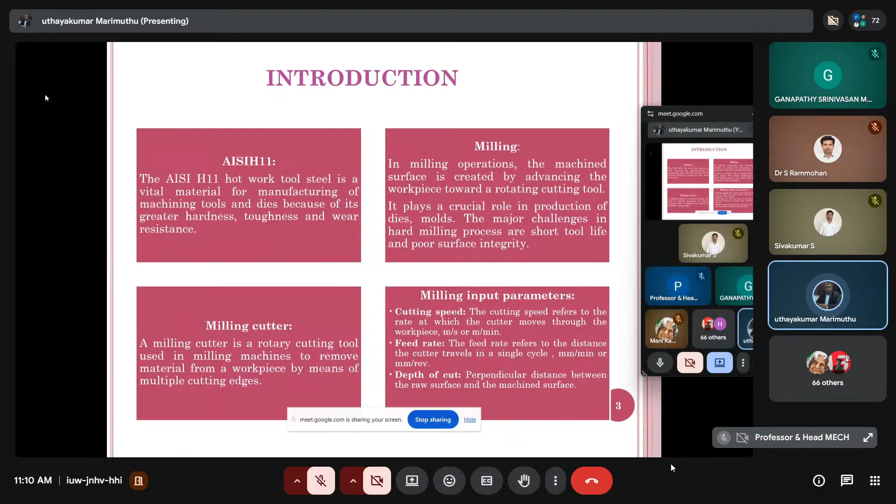It may be 0.1 mm or 0.5 mm, something like that - it depends on this one. So here you can see the milling performance parameters: cutting temperature, surface roughness, and chip. These are all output responses.

The earlier three parameters we discussed are the input parameters, which are under our control. So according to the requirement, we can choose which level we want for the input parameter. The output response is beyond our control - that is cutting temperature, surface roughness, and the chip.

Cutting temperature arises from tool-workpiece friction and material deformation, impacting workpiece integrity, tool life, and cost. Surface roughness is the measure of microscopic irregularities on a machined surface, influencing its texture, quality, and performance. So here, what you heard - there may be ups and downs on the surface.

This is called waviness. For a mating component, we have to be very clear about the surface finish - then only will the assembly work. Unless otherwise specified, we can take the general tolerance, but it depends on the case to case where it is going to apply.

Chip is the material removed during the machining, and its control is crucial for a smooth, high quality machined surface. Since it is a brittle material, we cannot go for long chips - it should be short, and we have to take into account how the chips are removed from the workpiece material. This chip nature determines the surface quality or surface texture, etc.

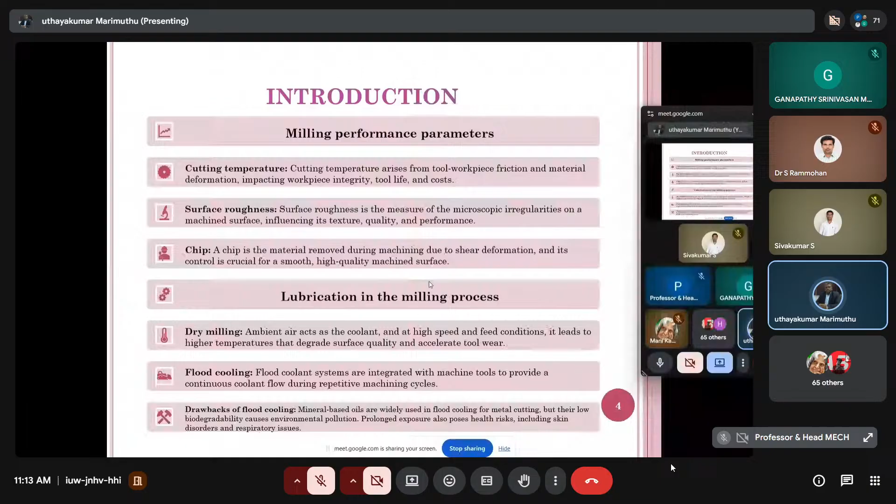This is about the MQL system. Here, lubrication in milling operation, minimum quantity lubrication that we have to ensure, that we have to use. For this purpose, MQL is abbreviated as minimum quantity lubrication system.

This is overcoming flood cooling. Unnecessarily excess coolant is used in this case without having any calculations, right? So that should be avoided here.

MQL method delivers a precise mixture of compressed air and cutting fluid in minimal quantity, which is then directed exactly in the machining zone through a nozzle. So the cutting zone is cooled, and the temperature remains constant throughout the machining process. So it serves as a sustainable machining technique, offering ecological, economic, and operational benefits.

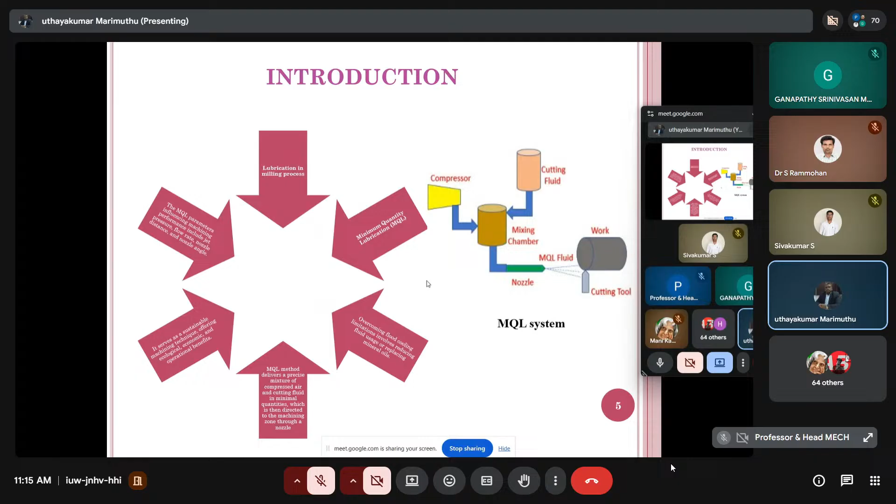Now this is about vegetable oil in the MQL system. Vegetable-based oils are a greatly attractive replacement for mineral-based cutting oil since they are renewable, eco-friendly, and easily decomposable. Vegetable oils such as soya bean, sunflower, sesame oils, and natural fatty acids form a strong adhesive film on metal surfaces, reducing friction and wear.

So we cannot eliminate friction and wear at any point of time. Without friction, we cannot walk. If the surface has no friction, we cannot walk. So minimum friction should be there, depending upon the type of flooring. In case of mud surface, the friction should be more. If it is mosaic or tiles, different coefficients of friction will be there. But friction is essential in our day-to-day life. Without friction, we cannot stop the vehicle. So we can minimize it as far as possible.

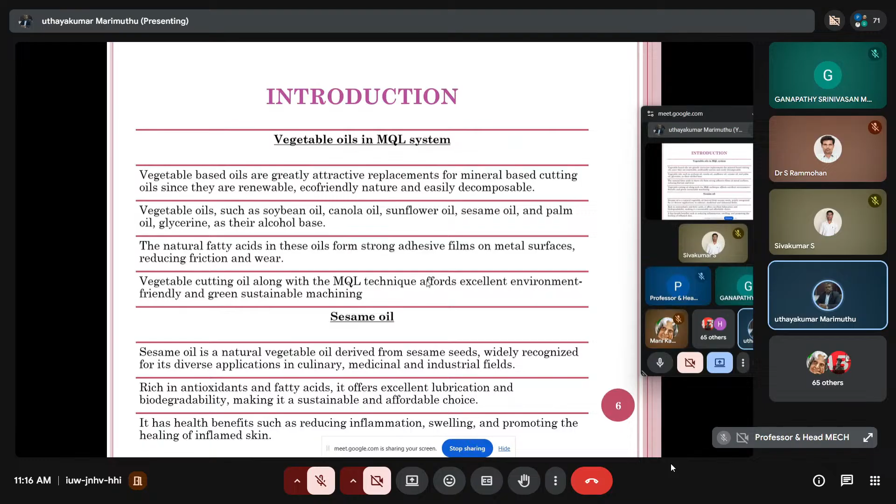So vegetable cutting oil along with MQL technique offers excellent environment-friendly and green sustainable machining. Sesame oil is a natural vegetable oil derived from sesame seeds, widely recognized for diverse applications. Rich in antioxidants and fatty acids, it offers excellent lubrication and biodegradability. It has health benefits such as reducing inflammation, swelling, and promoting the healing of inflamed skin.

Now, we are going to use nano-based cutting fluid and graphene nanoplatelets. It is for the cooling purpose that we are using in the milling process.

Why am I giving this much information in this case study? Because you have to understand what is what. We cannot do this optimization merely without having real-time data. Real-time data is very important in getting reliable results. So you have to double check the experimental results. If you want to perform experimental results, you have to take a proper survey, meaning you have to design the experimental design. It is very important, so now we are using this one.

I don't know how many research scholars are attending this. Novelty is very important in your research. What is the new thing you are going to find? What is the deliverable, and where is it going to be used? Who will be the benefiter?

In those days, it was not much attracted by the researcher. Now it is a big question by similar interest group people. Merely academic research will not work it out, meaning you get funding, submit the report, publish a paper, and one person gets a PhD. That is not what you call the parameter at present.

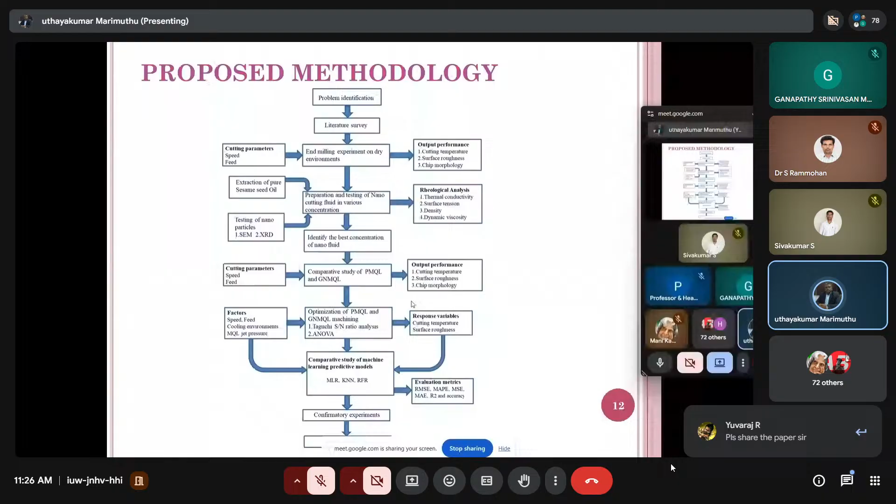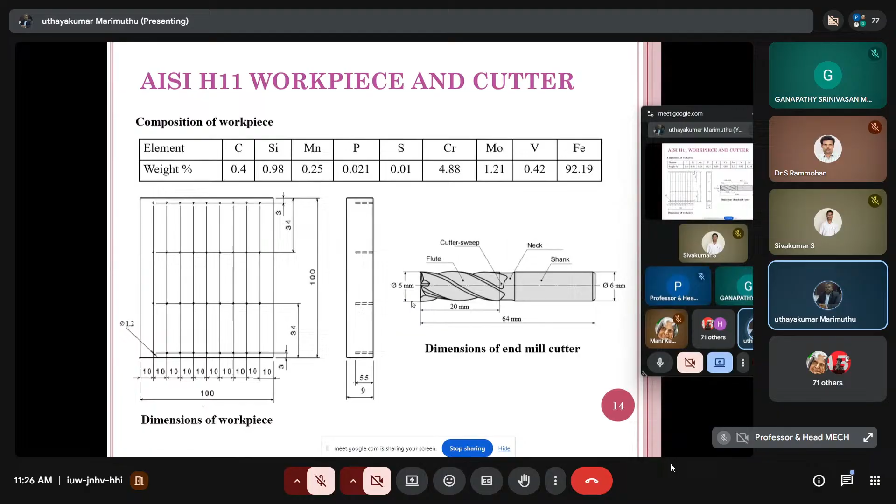Now you can see this is about the workpiece and cutter type of material, how we are going to use it, what are the major compositions of the workpiece, and the dimensions of the end milling cutter. Now this is the MQL equipment.

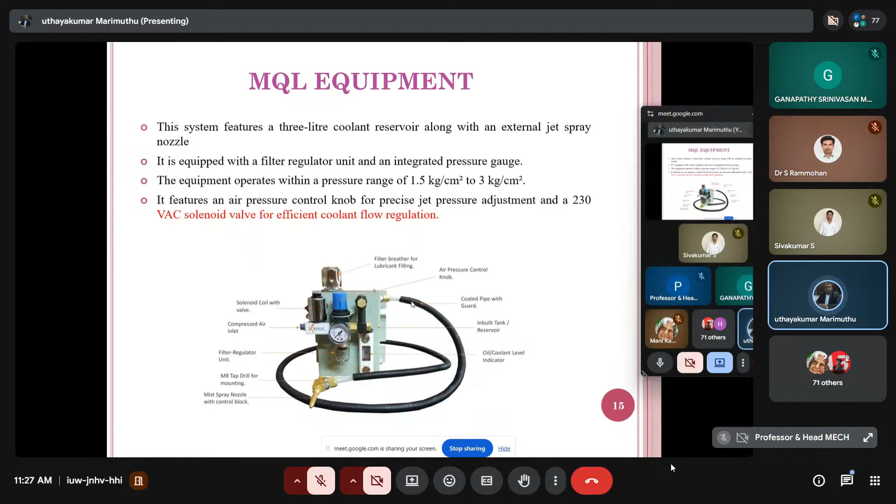The system features a 3-liter cooler, so only a small portable one we have developed. A 3-liter coolant reservoir along with an external jet spray nozzle. It is equipped with a filter regulator unit and integrated pressure gauges. The equipment operates within the pressure range of 1.5 kg per centimeter square to 3 kg per centimeter square. It features an air pressure control knob for precise jet pressure adjustment and a 230 VAC solenoid valve. This is our own design that we have done.

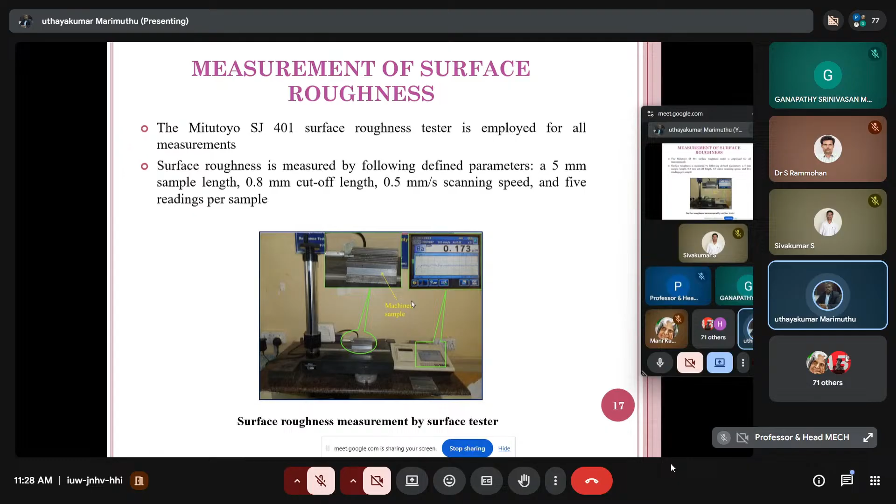Next one is the surface roughness measurement. A Mitutoyo SJ401 surface roughness tester is employed to measure the surface roughness. We are reporting the arithmetic average RA value, and the specification reported here is 5 mm sample length and 0.8 mm cutoff length. We did this for every machined surface, and the roughness value is reported.

Now, the dry milling experimental framework. This experimental framework is very important. Researchers, all of you keep in mind that you are going to take some values as input parameters. How do you choose this input parameter? There are different ways: one is by means of previous literature, or the limitation of the machine, or the requirement of the applications where you want to go. Another is the specification given by the manufacturers. There are 4 different parameters associated with that. So you have to be careful while choosing the experimental design. It is very important, so thorough literature review is very important.

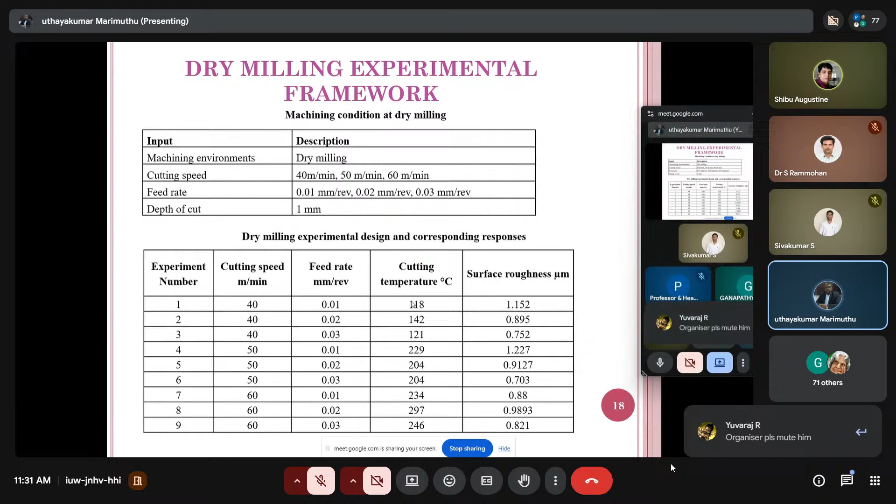Next, this is another important thing: the discussion or science behind the results. We have to do this in a systematic way. Such evidence is very important. How should it be? It should be XRD analysis. XRD confirms a graphene plane. Another one is from the SEM, showing a sheet-like structure with folds and wrinkles.

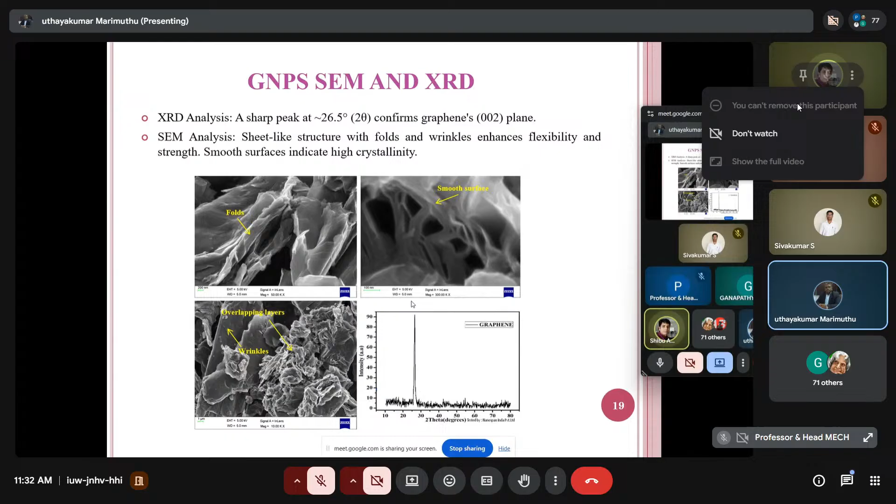This is witnessed through the metallurgical evidences. The metallurgical evidence is very important in giving the scientific report. The scientific report is very important accordingly. Then preparation and testing of nanofluid.

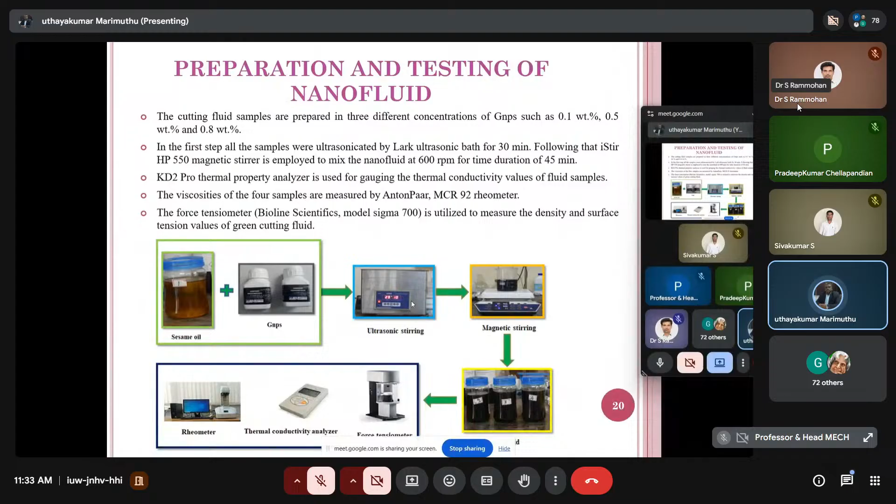It's actually about the preparation and testing of nanofluid cutting fluid. The cutting fluids are prepared in 3 different concentrations of graphene nanoplatelets: 0.1, 0.5 and 0.8%. This is the sequential steps associated with preparing that, by means of magnetic stirring, and we are getting the nanofluid according to our requirement.

This is about the comparative study of PMQL and GNMQL environment or framework that we have. So the machining environment, PMQL and GNMQL, cutting fluid, sesame oil, graphene reinforced sesame oil, and cutting speed is 40, 50 and 60 meter per minute, along with feed rate and depth of cut.

Depth of cut throughout the process is constant at 1mm, and the flow rate and jet pressure are given. These are all the input parameters that we can limit or control ourselves.

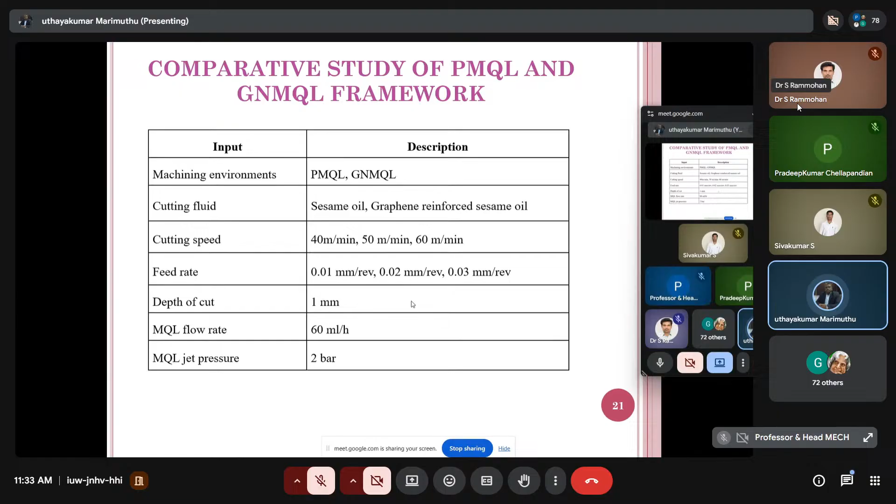Now when you see the experimental results, the last 2 columns, the cutting temperature and surface roughness, these two are the visible output response from this individual experimental process. It may be 18 number of experiments. The first 9 are PMQL environment, and the rest is GNMQL environment.

Accordingly, the cutting speed and feed rate are given. Depth of cut I didn't mention because it is 1mm throughout the process. You can see the output of cutting temperature and surface roughness in microns.

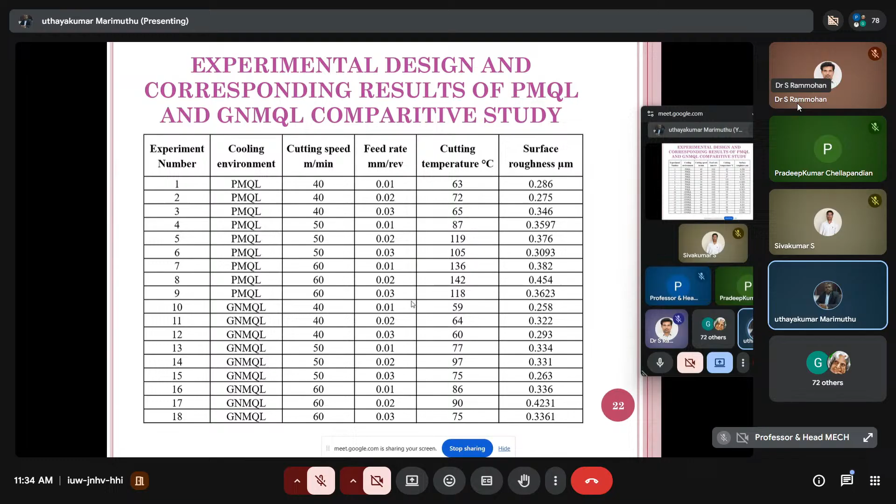This is the framework for statistical analysis. The experimental parameters were systematically arranged using Taguchi L36 orthogonal array. The optimization process was conducted using Taguchi signal-to-noise ratio methodology, employing Minitab 18 software. ANOVA was performed by evaluating the significance of factors influencing both cutting temperature and surface roughness.

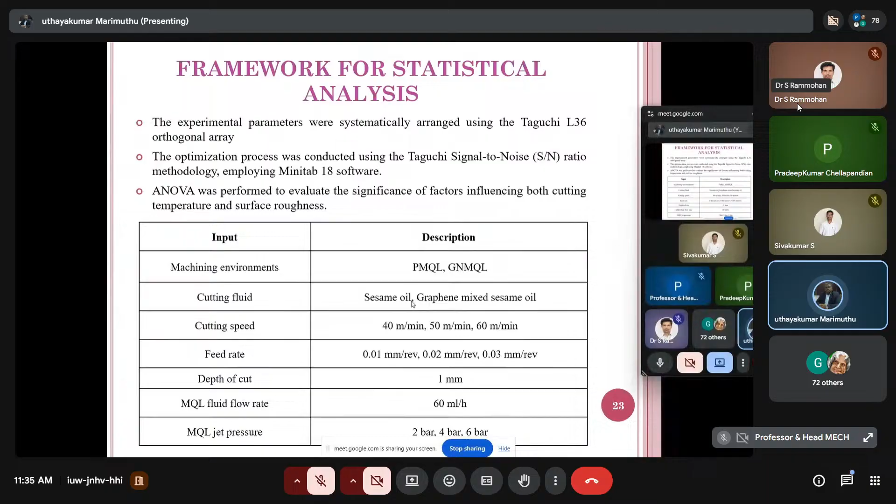This is about machining environment, cutting fluid, cutting speed, feed rate, depth of cut, MQL flow rate, and jet pressure. Jet pressure we varied 2 bar, 4 bar, and 6 bar. Feed rate also varied 0.01, 0.02, and 0.03. Cutting speed 40, 50 and 60, like that.

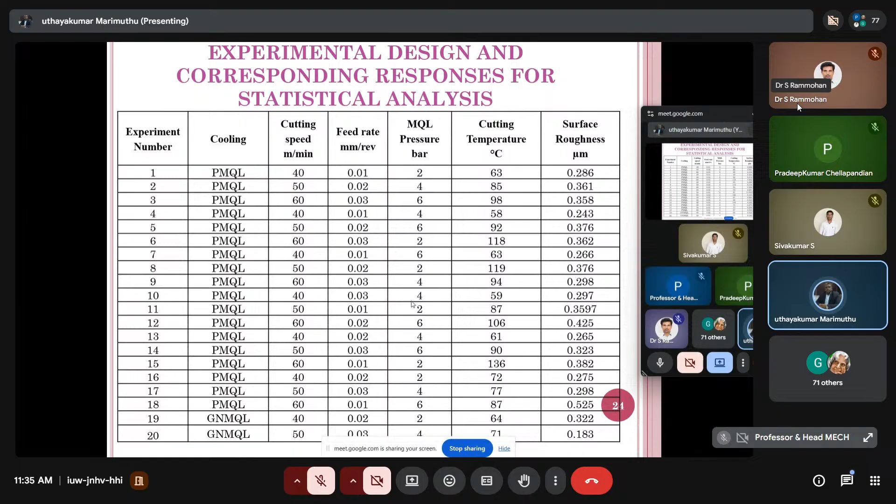Now you can see the corresponding results about the experimentation - experimental design and corresponding responses for statistical analysis. This is very important for our analysis. Totally 36 experiments have been planned and we did accordingly. These are the results for the total 36 experiments.

Now, the data processing for ML models. Python programming was used for feature engineering and the creation of ML models. The dataset dimensions are checked, revealing 36 rows and 6 columns. Someone asked about L36, L27 - it depends on the factor of safety. It was verified that there were no null values in the dataset.

A histogram was used to assess the distribution of numerical variables, and box plots were employed to identify outliers. The relationship between variables were analyzed using a correlation heat map. The Gaussian data augmentation technique was employed to mitigate overfitting caused by the limited dataset.

The dataset was divided into X for explanatory variables and Y for the response variables, cutting temperature and surface roughness. The standard scaler technique was applied to ensure all the features contributed equally to the learning process and to improve model performance. This is the methodological approach for the ML model.

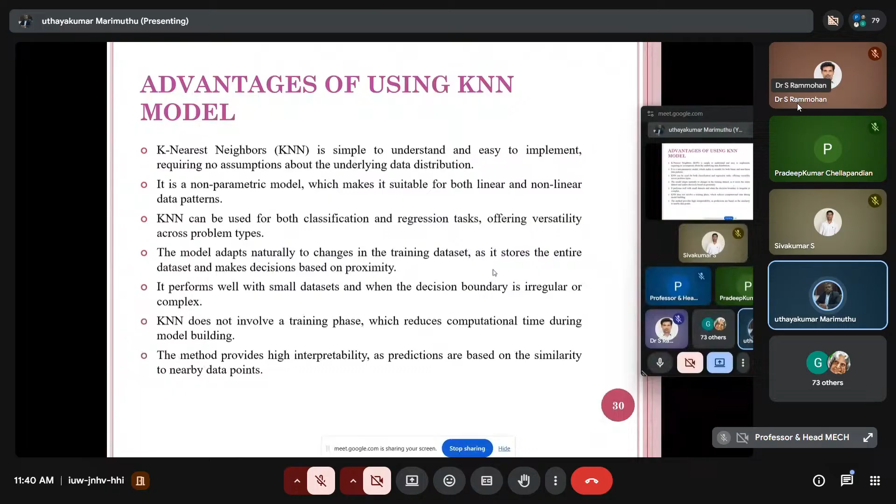This is about the KNN working principle. It's a supervised learning algorithm used for classification and regression problems. It works based on the idea of similarity. The outcome for the new data point is predicted based on the outcomes of its nearest neighbors in the training data.

Then evaluation metrics for ML models. Machine learning model evaluation metrics quantify how well a model performs, providing insight into its accuracy, efficiency, and suitability for the task at hand. These metrics help compare different models and algorithms, ensuring that the chosen model is accurate, dependable, and appropriate for the specific problem. This is the evaluation metrics for ML models.

It's the mean absolute error, which measures the average absolute difference between predicted and actual values. Lower MAE means better accuracy. Mean squared error calculates the average of squared differences between predicted and actual values. Root mean squared error measures the average size of prediction errors. The lower the RMSE, the closer the model predictions are to the real values.

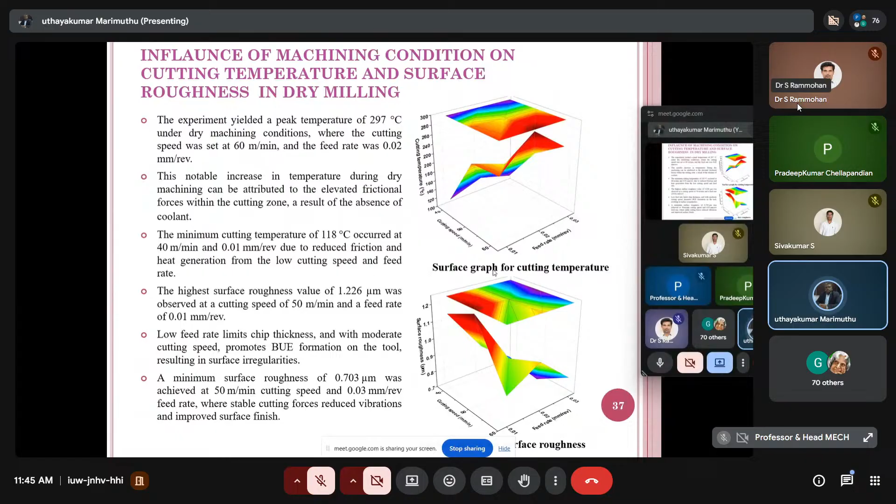A minimum surface roughness of 0.703 microns was achieved at 50 meters per minute cutting speed and 0.03 mm per revolution feed rate, etc. Now you can see the chip morphology in the dry machining process for each condition.

It is very important to look at the metallurgical evidence for chip morphology at each machining condition. According to the examination of the chip, there are scratches on the face. The cohesive force amid the AISI H11 and the tool produces the scratches, while the chip flow workpiece got scraped due to the existence of hard particles on the tool exterior.

At high cutting speed and increased feed rate, fragmented chips are more likely to form due to excessive strain and localized heating. There is no chance for continuous chip formation; it is not a ductile material. The hairy layer of chip in dry machining conditions is evidence of a more ductile structure.

At higher speed and feed rates, the chip appeared curved due to increased heat, lack of lubricant, and heat transfer at the tool-chip interface. At low cutting speed and low feed rate, continuous chips are formed due to smooth and stable shearing of material. You can see the first one, that is a serrated one. The purple colored chips were observed at high cutting speed and feed conditions.

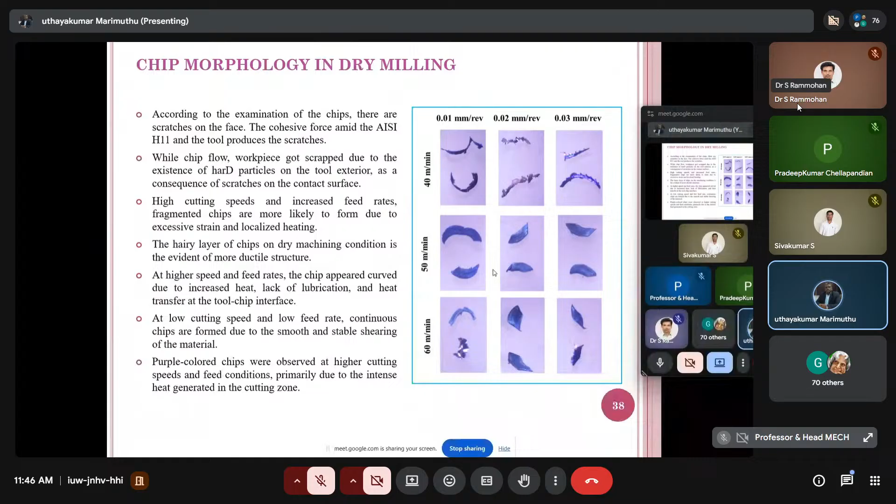Now it is about the nanofluid preparation, testing, and a comparative study of PMQL and GNMQL. This is the first case study, over. This is the next one.

Now analysis of thermophysical properties of the cutting fluid. The thermal conductivity increased with higher GNPS concentration due to the superior thermal properties of GNPS compared to vegetable oil. The thermal conductivity value of nanofluid at 0.8% concentration is the maximum. The surface tension value influenced by GNPS concentration decreased with increased value, owing to the attraction between the higher intermolecular energy of nanofluid, so surface tension decreased within the concentration. The penetrability of nanofluid is enhanced due to the lower surface tension value, which leads to effective lubrication in the cutting zone. The density increased with GNPS concentration measured, and the highest viscosity value is 86.12. The thermophysical property analysis revealed that GNPS with 0.8% weight exhibited potential results among all. That is the conclusion we made from this study.

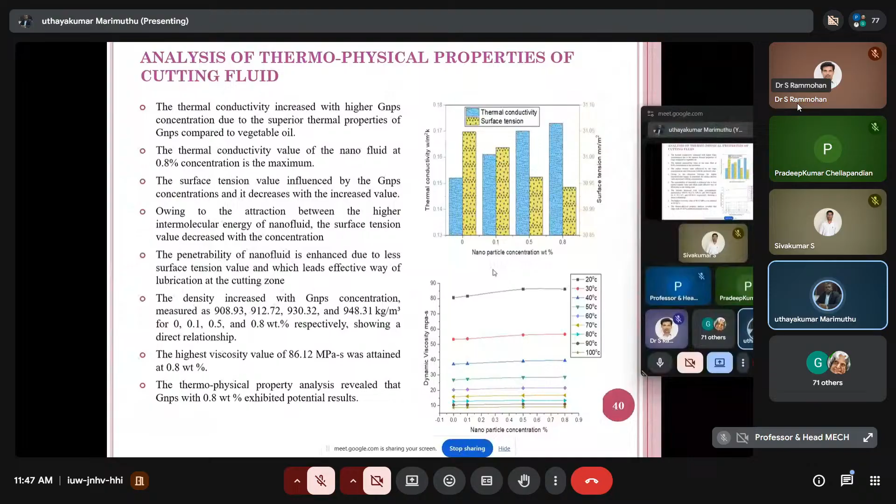Then, influence of machining conditions on cutting temperature in PMQL and GNMQL environment. Now we are introducing the coolant; in the previous case there was no coolant. Now you can see the cutting temperature is lowered by 55%, from 297 to 142. Earlier case it was 297, now it is 142. So approximately 55% of temperature is decreased through enhanced lubrication.

While GNMQL with nanoparticles further cools to 90 degrees centigrade, totaling a 54.3% drop from the dry machining process when compared. This notable reduction can be attributed to the lubrication effect, which facilitates convective heat transfer with minimal but effective lubrication supplied in the PMQL system. The introduction of nanoparticles augments the lubrication and thermal properties of the cutting fluid in the GNMQL environment. The lowest temperature recorded in GNMQL conditions was 59 degrees centigrade at a cutting speed of 40 meters per minute and a feed rate of 0.01 mm per revolution.

The cutting temperature rise is attributed to increased spindle speed and so on. The higher cutting temperature is noted at 0.02 mm per revolution feed rate compared to 0.03 mm per revolution, due to increased contact time between tool and workpiece.

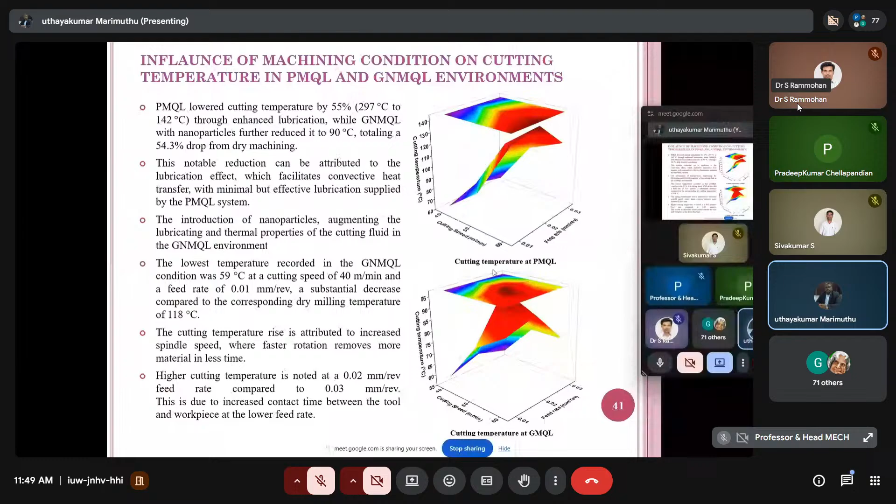Our core job is the real-time experimentation; modeling is a portion of your thesis. In my point of view, it may be 80-20 or 90-10, but the prediction is very important, so that is very approachable using n number of data.

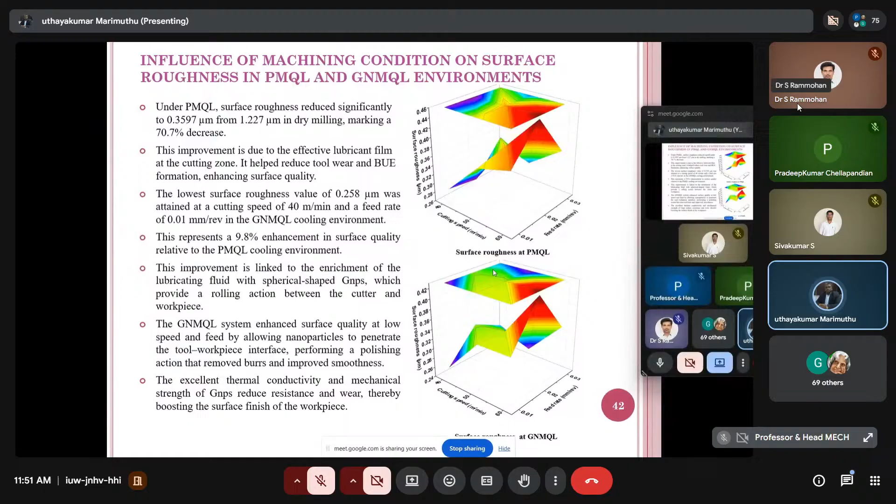The improvement is linked to the enrichment of the lubricating fluid with spherical shape GNPS, which provide a rolling action between the cutter and workpiece. The GNMQL system enhances surface quality at low speed and feed by allowing nanoparticles to penetrate the tool-workpiece interface, and in that way we claim that superior surface finish is realized by adding this GNMQL environment.

Then the GNMQL shows, what do you call...

They're calling for some other meeting.

An effective decrease in cutting temperature is achieved with an elevation in jet pressure, reaching optimal efficiency at 4 bar pressure. The optimum pressure ensures finer oil mist droplets, improving lubrication and reducing friction in the cutting zone.

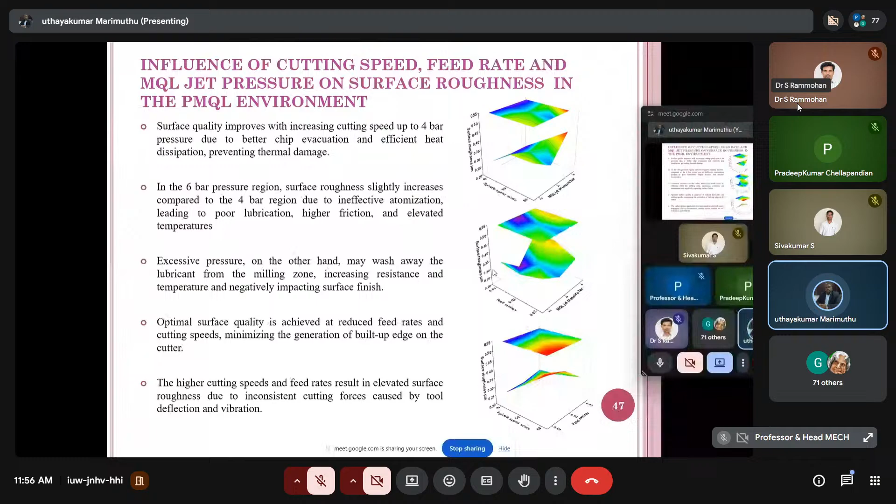That can be measured by instrument - a cutting force dynamometer - we can use that. So this is about the surface roughness in the GNMQL environment.

The introduction of spherical shaped nanoparticles between the milling cutter and workpiece facilitated a rolling action, substantially reducing resistance, wear, and heat generation during cutting operations. Consequently, this resulted in lower cutting surface roughness values across all speed conditions compared to traditional PMQL conditions.

Minimum surface roughness occurred at 0.01 mm per minute feed rate at high pressure, likely due to better penetration of lubricant and nanoparticles into the cutting zone. Lower cutting surface finish was observed at lower machining parameter conditions, and vice versa.

The enhancement in surface quality is due to the polishing and self-repairing effect enabled by the nanoparticles. The lowest surface roughness of 0.172 micron was achieved with optimal machining conditions in a GNMQL environment, with input parameters of cutting speed 60 meters per minute and feed rate 0.01, and so on.

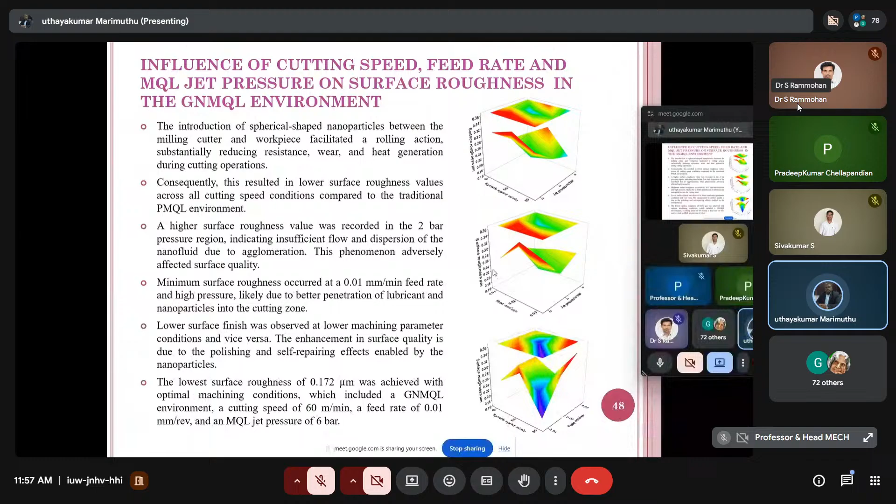This is about the Taguchi-based analysis of optimum parameters for cutting temperature and surface roughness.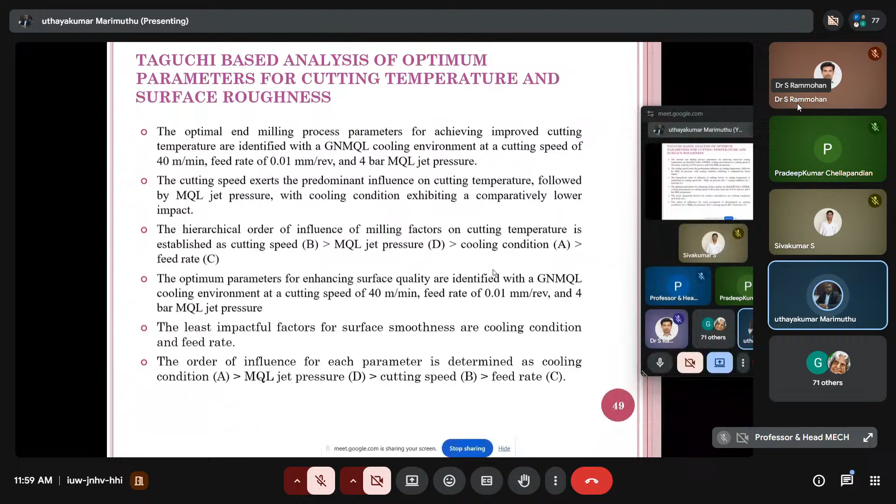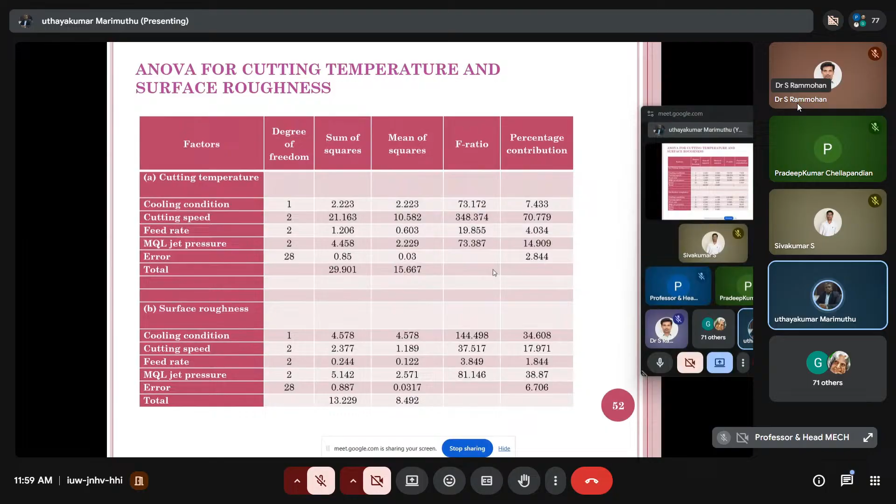The optimum parameters for enhancing surface quality are identified with the GNMQL cooling environment at a cutting speed of 40 meters per minute, feed rate of 0.01 mm per revolution, and 4 bar MQL jet pressure. The least impactful factors for surface smoothness are cooling conditions and feed rate. The order of influence for each parameter is: cooling conditions A, MQL jet pressure D, cutting speed B, then feed rate C. This is about the mean value for surface roughness, as opposed to earlier which was temperature. Now we move to feature engineering insights for the cutting temperature data.

Analysis of the distribution plot reveals that speed, feed, and MQL pressure exhibit uniform distribution. A positive skewness is evident in the frequency distribution of cutting temperature, attributed to the prevalent occurrence of temperatures within the 100 to 130 degrees centigrade range, due to the utilization of PMQL and GNMQL techniques. In the box plots, no outliers were detected in the speed, feed, and MQL pressure data. However, outliers are observed in the cutting temperature box plot, particularly in instances of PMQL machining conditions.

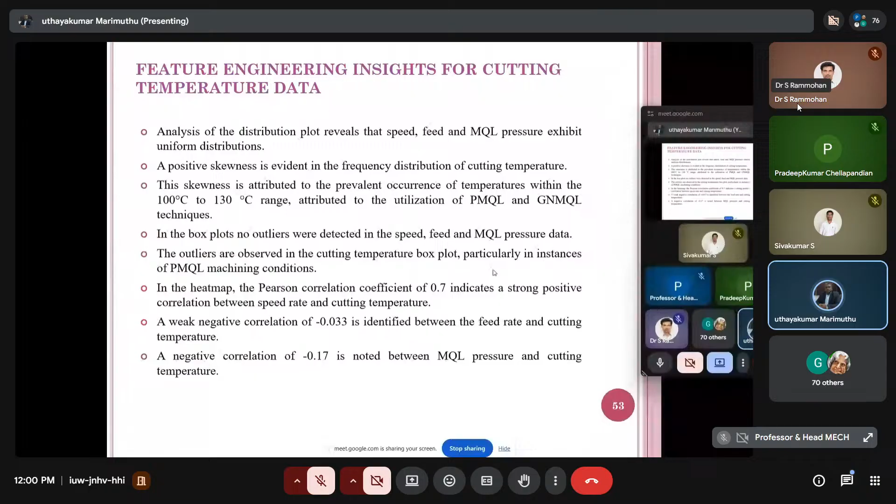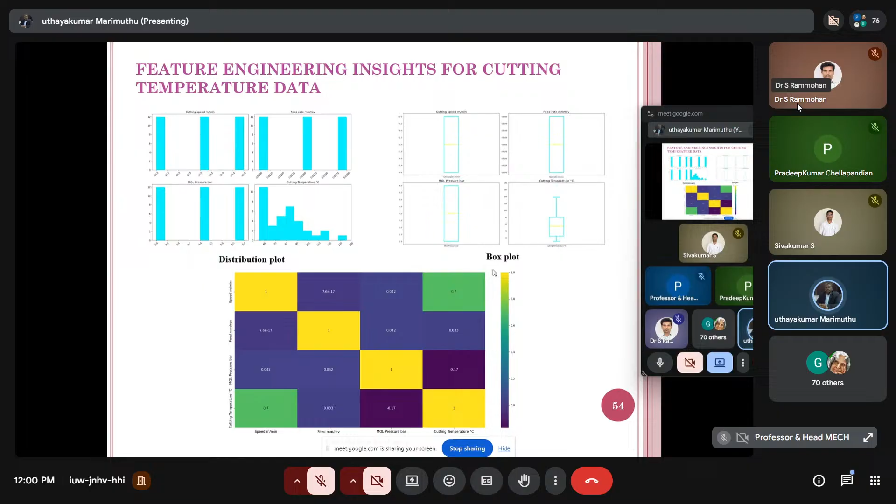In the heat map, the Pearson correlation coefficient of 0.7 indicates a strong positive correlation between cutting speed and cutting temperature. A weak negative correlation of minus 0.033 is identified between feed rate and cutting temperature. A negative correlation of minus 0.17 is noted between MQL pressure and cutting temperature. Now you can see the feature engineering insights for cutting temperature data and heat distribution, as witnessed in the box plot reported there. This is about the surface roughness data.

The distribution plot shows that cutting speed (40, 50, 60), feed (0.01, 0.02, 0.03), and MQL jet pressure (2, 4, 6 bar) are uniformly distributed. The surface roughness distribution shows positive skewness with most values between 0.25 to 0.38 microns due to PMQL and GNMQL use. Higher values of 0.43 to 0.53 are linked to ineffective jet pressure, which is an inference from our study. The analysis of box plots reveals no outliers in speed, feed, and MQL jet pressure, while outliers are evident in the surface roughness box plot, especially under PMQL machining conditions.

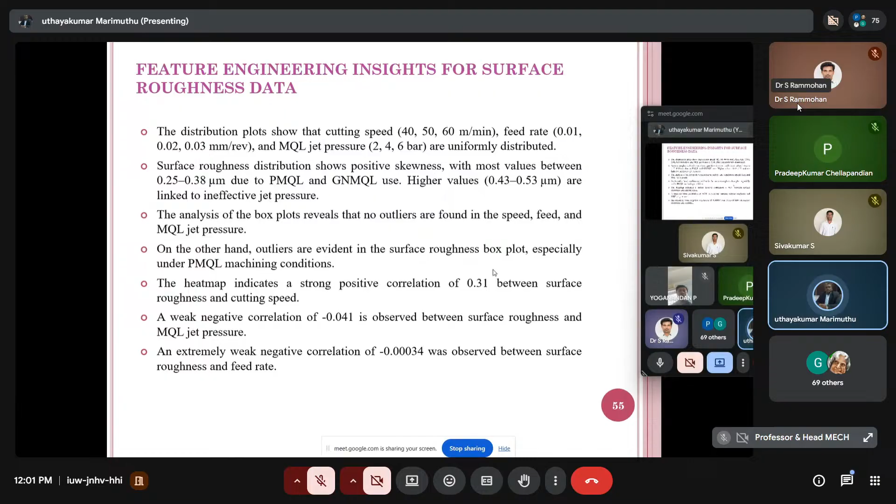The heat map indicates a strong positive correlation of 0.31 between surface roughness and cutting speed. A weak negative correlation of minus 0.041 is observed between surface roughness and MQL jet pressure. An extremely weak negative correlation of minus 0.00034 is observed between surface roughness and feed rate. Appropriate evidence to show this was presented using the distribution plot and box plot reported there.

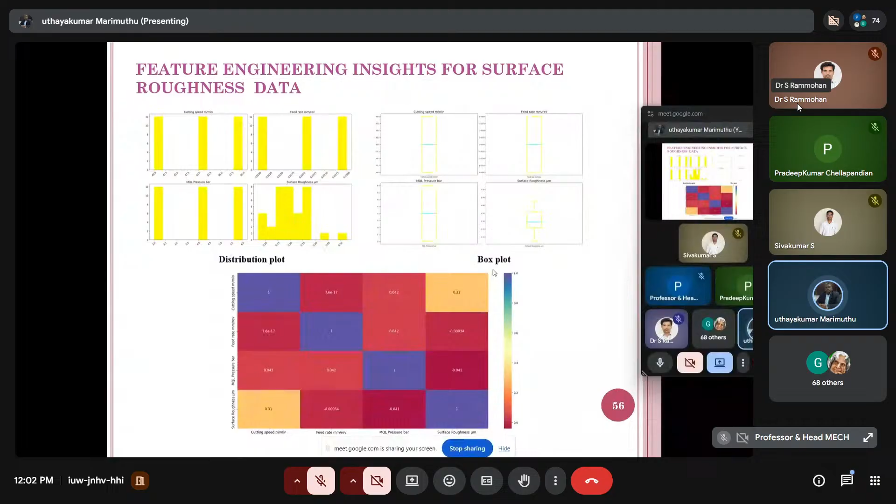Next is the development and comparison of ML models for cutting temperature. During development of the ML models, 80% of the data was utilized for training and the remaining 20% was retained for testing. The initial ML model was constructed using the MLR model, with the appropriate equations presented earlier. The regression equation is T equals so and so, which we arrived at using Python programming, and we got the results.

In the RFR model, hyperparameter tuning yielded the following optimal values: a maximum depth of 20, a minimum of 1 sample per leaf, 5 samples required to split a node, and 200 estimators. The KNN model was evaluated using different values of K along with two distance metrics, Euclidean and Manhattan, and two weighting schemes, uniform and distance-based. The optimal configuration was achieved with 5 neighbors, and the results are reported here.

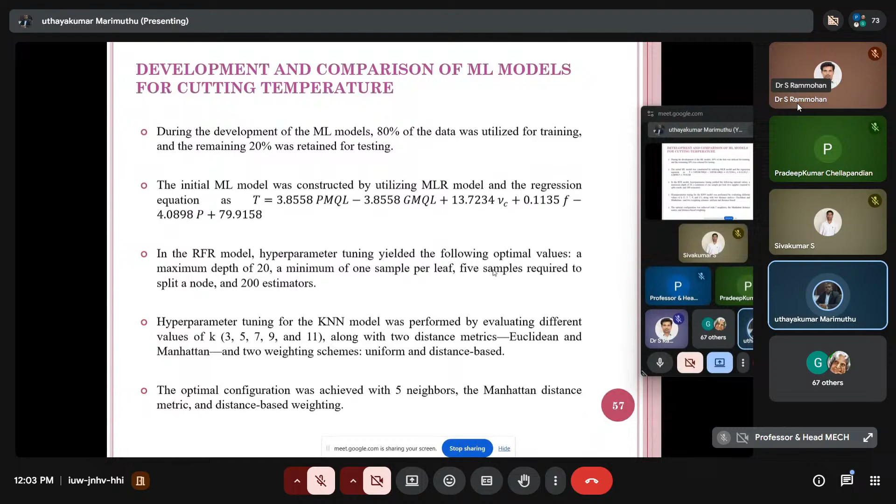This poor performance is due to the linear assumption, which limits its ability to capture complex or nonlinear relationships. The KNN model attains the highest metric scores, reported with an accuracy of 97.4%. RFR is 95.3%, MLR is 90.15%, and KNN is 97.4%.

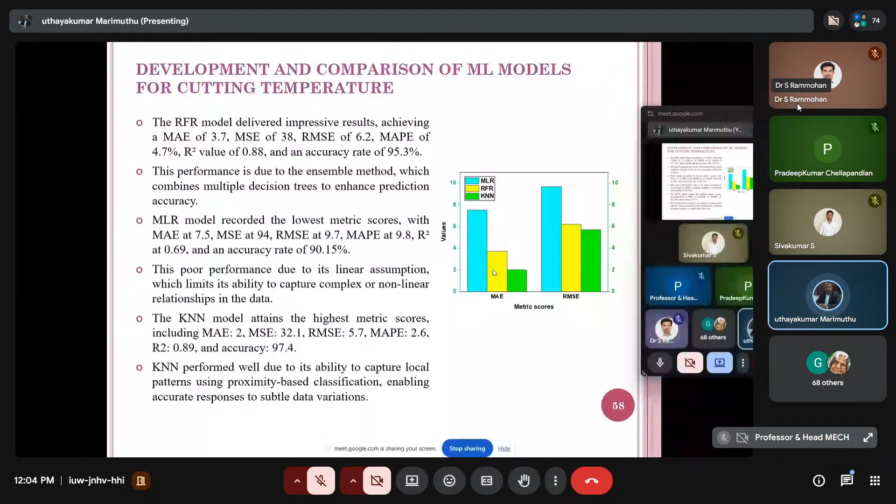KNN performed well due to its ability to capture local patterns using proximity-based classifications, enabling accurate responses to subtle data variations. So this is about the models and its comparison.

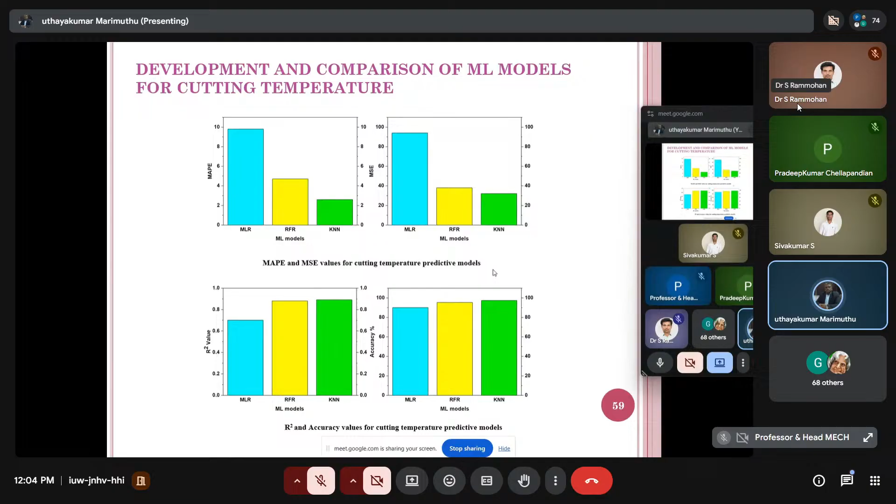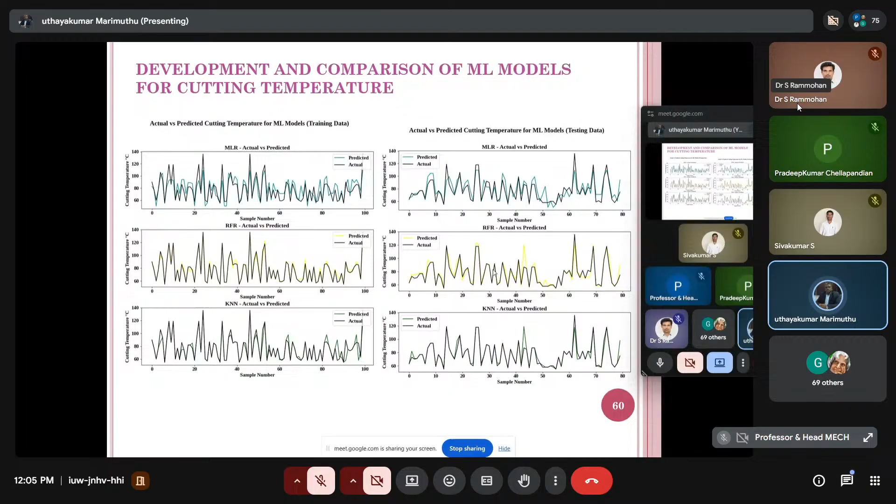So this is about the development and comparison of the model for cutting temperature. The actual and predicted values are presented here, according to sample number and cutting temperature. So this is about the ML model for surface roughness.

The MLR model established a predictive equation for surface roughness. The R-squared value is listed here.

The optimal 4 samples per leaf, a minimum of 10 samples kept to split an internal node, and a total of 50 estimators. The KNN model's number of neighbors was set to 5, uniform weights were applied, and the p-value was set to ensure optimal performance. This RFR model demonstrated, and it is presented here.

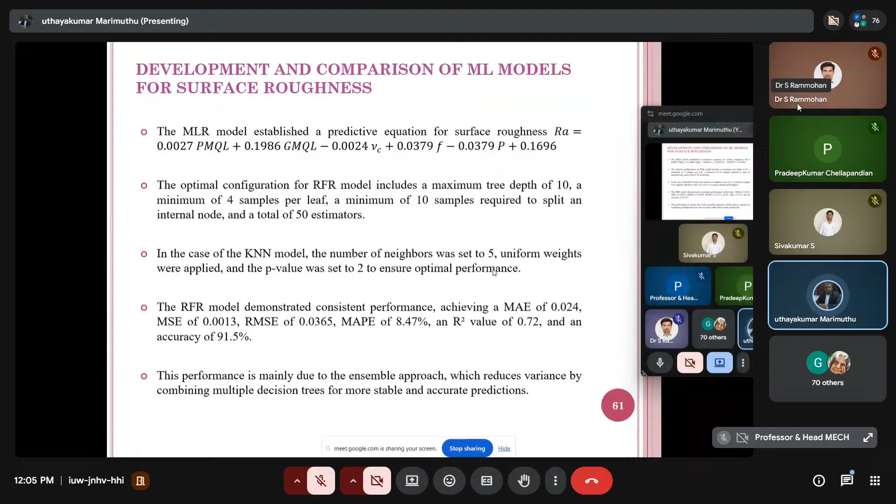This performance is mainly due to the ensembling approach, which reduces variance by combining multiple decision trees for more stable and accurate prediction.

The KNN model outperformed the others, achieving the highest performance on metrics like MAE, MSE, and R, and reported an accuracy of 92.9%, which is superior. This result stems from its non-parametric nature, which enables it to effectively capture non-linear relationships without imposing strict assumptions on the data distribution.

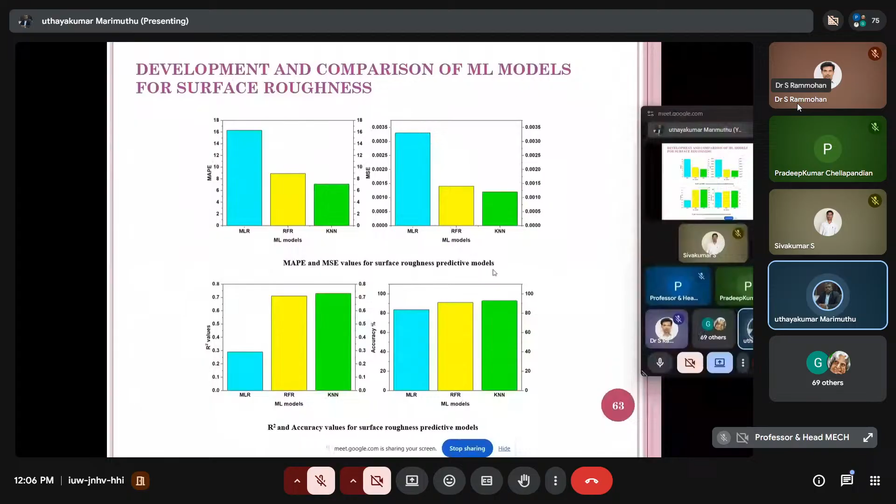This is the comparison, about the sample, MLR, RFR, and KNN. So you can understand how it should be compared at the end.

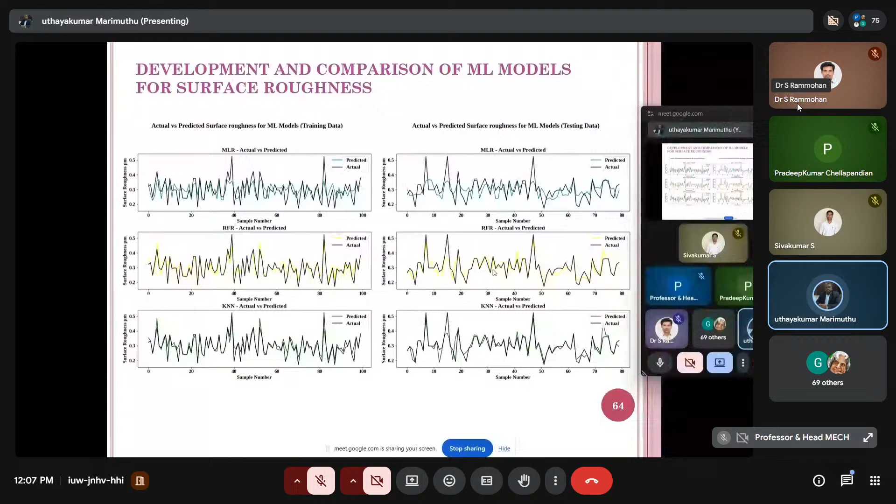So the potential applicability should be witnessed by how much accuracy is projected by the real-time application, compared with the real-time application. This is about the confirmation experimentation.

This confirmation test compared with the KNN predicted value. This may be the output response to cutting temperature and surface roughness. A1, B2, C2, D1 is a combination of the Taguchi design. The predicted value from the KNN model was 58, experimental value 56, difference is 2, and the surface roughness is similar. And the corresponding images of the machined surface according to this condition.

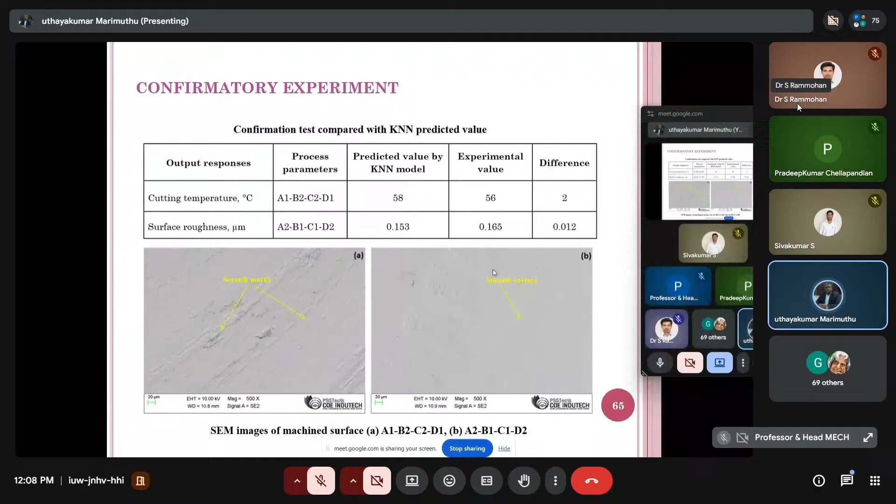This one we took from the PSG Tech. So the scratch marks, how it is there, and smooth surface, how it is exposed. So those things are done.

Now coming to the conclusions: a peak temperature of 297 degrees centigrade was observed under dry machining at 60 meters per minute and 0.02 mm per revolution. There is an absence of lubrication in that case.

Continuous chips are produced under low cutting speed and feed rate, as the material undergoes steady and uniform shearing during machining. Purple colored chips appeared at high cutting speed and feed due to intense heat generation. That's the science behind it.

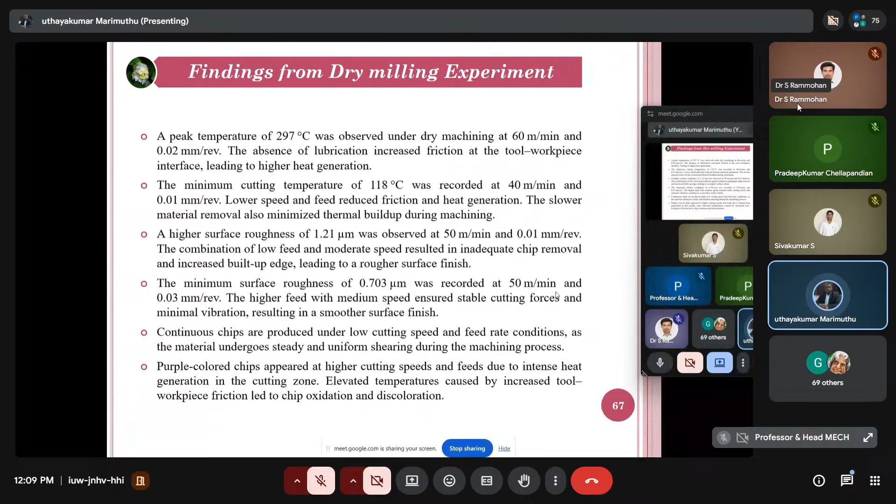We can say this is the continuous chip, this is the continuous chip. Why? What went wrong, or why did it occur? What is the reason for that? We have to discuss in detail.

So the findings of nanofluid preparation, testing, and a comparative study of PMQL and GNMQL environments: the thermophysical property analysis revealed that GNPs was 0.8%. Among the three, 0.8 exhibits the potential results.

PMQL lowered the cutting temperature by 27.9, enhancing lubrication and cooling. GNMQL further reduced it to 90 degrees centigrade. Under GNMQL, the lowest temperature, 59 degrees centigrade, was recorded at 40 meters per minute and 0.01 mm per revolution.

PMQL reduces surface roughness by 70.7% decrease compared to higher values in dry milling, due to improved lubrication that minimized built-up edge formation and tool wear.

GNMQL achieved a lower surface roughness of 0.258 microns at 40 meters per minute and 0.01 mm per revolution, improving by 9.8% over PMQL due to GNPs enhancing lubrication, heat dissipation, and wear resistance.

PMQL and GNMQL environment showed improved cooling and minimized notch formation. The GNMQL environment generated fewer serrated chips than PMQL, owing to nanoparticles' rolling action and the formation of protective tribofilm on the tool chip interface.

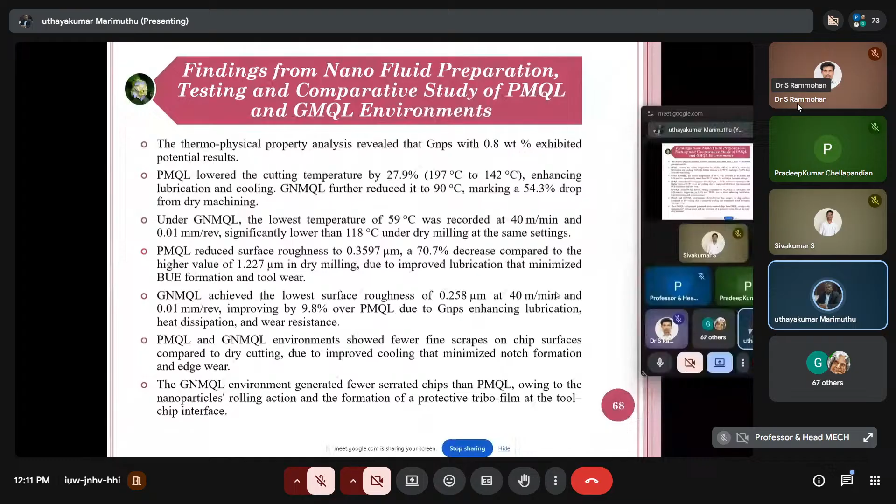The cutting temperature decreased for both PMQL and GNMQL as jet pressure increased, with the 4-bar pressure yielding the best results compared to others.

Minimum surface roughness of 0.172 micron was obtained under optimal conditions using the GNMQL setup, with a cutting speed of 60 meters per minute, feed at 0.01 mm per revolution, and so on.

Based on the Taguchi signal-to-noise ratio, the GNMQL environment achieved optimal results for both cutting temperature and surface quality at 40 meters per minute.

ANOVA results for cutting temperature show that cutting speed is the dominant factor, responsible for 70.779% of the variation, while MQL jet pressure contributes the rest.

The KNN model delivers the best results for predicting cutting temperature, achieving 97.4% accuracy in the case of cutting temperature.

It also shows the most effective surface roughness prediction in both cases, exhibiting 92.9% accuracy. Its edge lies in handling nonlinear patterns without assuming a specific data distribution.

Before winding up the session, I would like to show the paper. This is about the data pre-processing. Maybe I can share it with Rammohan.